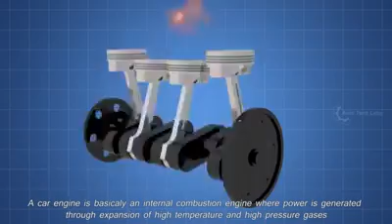Let's see how a car engine cooling system works. A car engine is basically an internal combustion engine where power is generated through expansion of high temperature and high pressure gases. A lot of heat is generated due to the combustion gas and the friction of mechanical parts. For sustained operation, this excess heat should be removed from the engine and kept at operating temperature.

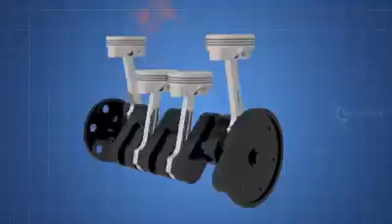Now let's see the parts involved in cooling the engine. The main parts for cooling the engine are water pump, radiator, thermostat, coolant temperature sensor, and coolant.

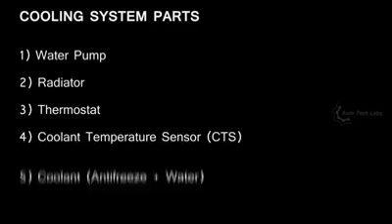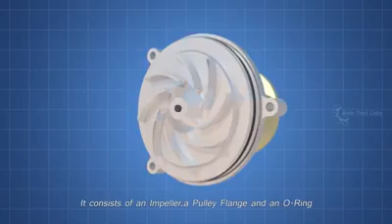First, the water pump. Water pump is the heart of the cooling system, which pumps the coolant. It consists of an impeller, a pulley flange, and an O-ring. The impeller is driven by the engine drive belt through a pulley.

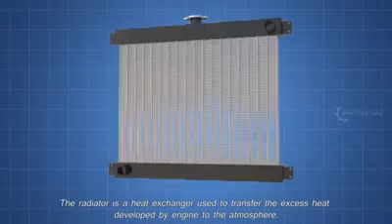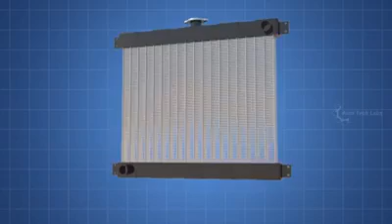Next, the radiator. The radiator is a heat exchanger used to transfer the excess heat developed by the engine to the atmosphere. The radiator has an inlet port, outlet port, a drain plug, and a radiator pressure cap. The radiator pressure cap plays a vital role in the cooling system, which will be explained later.

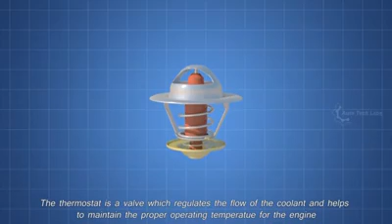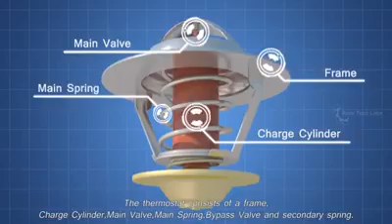Next, the thermostat. The thermostat is a valve which regulates the flow of the coolant and helps to maintain the proper operating temperature for the engine. The thermostat consists of a frame, charge cylinder, main valve, main spring, bypass valve, and secondary spring.

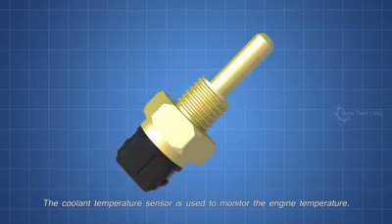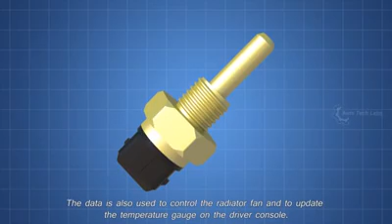Next, the coolant temperature sensor. The coolant temperature sensor is used to monitor the engine temperature. The ECU will use this data to manage fuel injection and ignition time. Some engines have more than one coolant temperature sensor. The data is also used to control the radiator fan and to update the temperature gauge on the driver console.

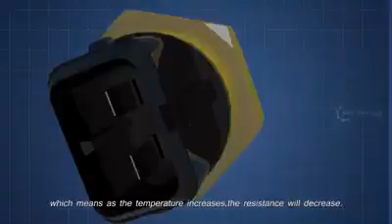The coolant temperature sensor consists of a sensing probe and an electrical connector. Most coolant temperature sensors are negative temperature coefficient type, which means as the temperature increases, the resistance will decrease. The CTS can be a 2-pin type or a 3-pin type, depending on the make of the vehicle. These are the main parts involved in an engine cooling system.

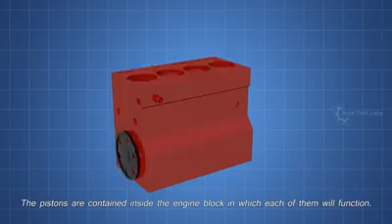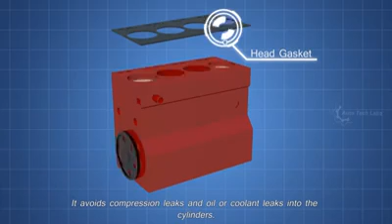Now, let's see how these parts work together. The pistons are contained inside the engine block, in which each of them will function. Above the engine block comes the head gasket, which provides sealing between engine block and engine head. It avoids compression leaks and oil or coolant leaks into the cylinders. Above that comes the engine head.

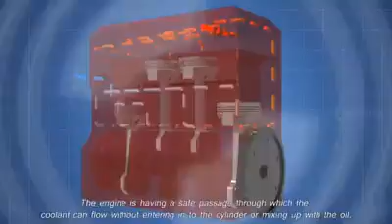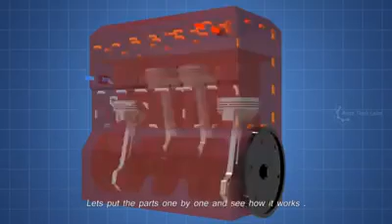The engine has a safe passage through which the coolant can flow without entering into the cylinder or mixing up with the oil. This passage is known as the water jacket. Let's put the parts one by one and see how it works.

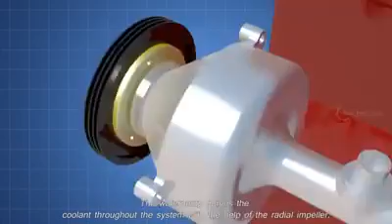The water pump pumps the coolant throughout the system with the help of the radial impeller. It is driven by the engine itself, using a serpentine belt. The serpentine belt also drives the power steering pump, alternator, and AC compressor. But for now only the water pump is shown. Now let's see the connections.

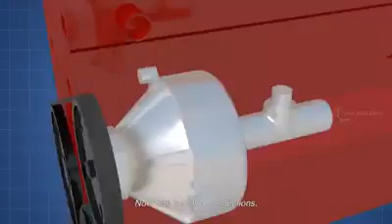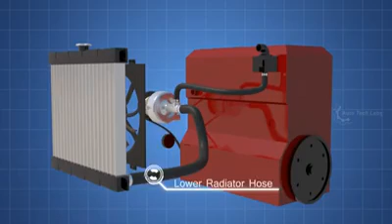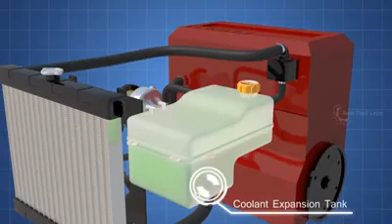The thermostat bypass hose. The thermostat housing. Inside the thermostat. The radiator, and the radiator fan. The lower radiator hose. The water pump outlet hose. The upper radiator hose. The coolant expansion tank. The expansion bleed hose. Coolant overflow hose. So, finally, let's get into the working, starting with the thermostat.

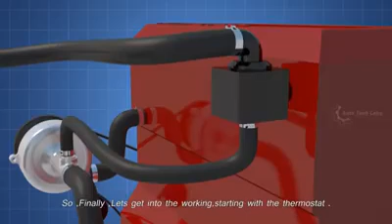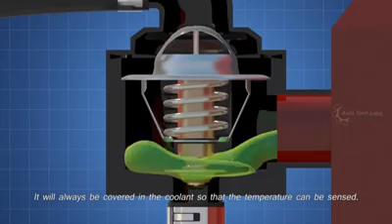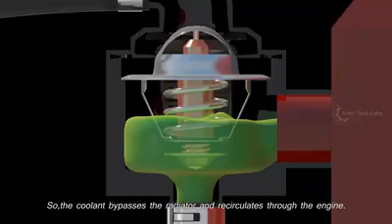The thermostat is actually a valve, which regulates the flow of the coolant. It will always be covered in the coolant, so that the temperature can be sensed. Let's start the operation from a cold engine. When the engine is cold, the bypass valve stays open. So, the coolant bypasses the radiator and recirculates through the engine. This helps the engine to heat up to operating temperature quickly.

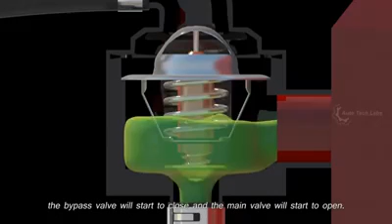Eventually, the coolant temperature increases by absorbing the heat from the engine. Once the coolant starts to reach higher temperature, which is usually between 160 to 190 Fahrenheit, the bypass valve will start to close, and the main valve will start to open. This allows the cold coolant from the radiator to flow to the engine side, and the hot coolant from the engine side to flow to the radiator.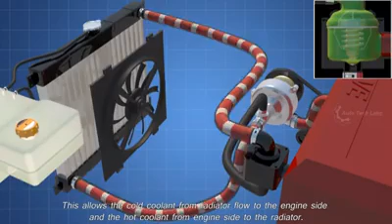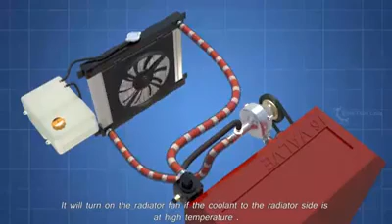In most cars, the coolant temperature sensor is located near the thermostat housing. It will turn on the radiator fan if the coolant to the radiator side is at high temperature. Now, the hot coolant in the radiator will release its heat to the atmosphere with the help of the fan. At the same time, the cold coolant received from the radiator will start to absorb the heat from the engine for the next cycle.

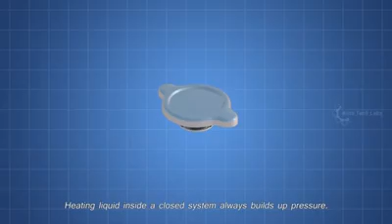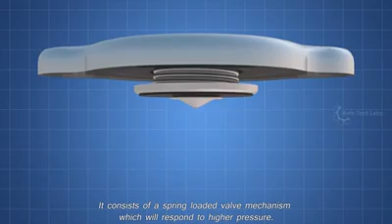Heating liquid inside a closed system always builds up pressure. So, how to maintain the pressure? Here comes the role of the radiator pressure cap. It consists of a spring-loaded valve mechanism, which will respond to higher pressure. Reaching a pressure above 15 psi will push the pressure cap valve, and the coolant flows to the expansion tank, until the pressure goes down to operation level.

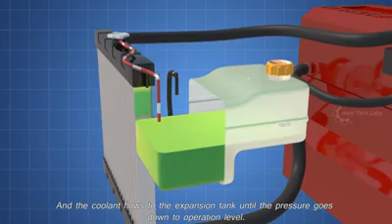And when the system cools down, the vacuum inside the system sucks back the coolant from the expansion tank. In case there is too much pressure build-up in the system, due to trapped air or other failures, the coolant in the expansion tank will be pushed out through the overflow hose.

The car heater system is a part of the engine cooling system. The heater system comprises the heater core, inlet and outlet hoses, and a heater control valve, which is optional and cannot be found in all vehicles. The heater core acts as a radiator, dissipating heat from the hot coolant to the vehicle interior, using a blower.